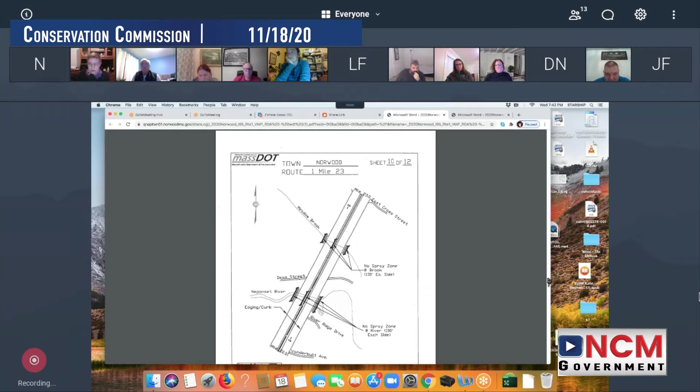Route 1, you should start on plan 8 of 12. So that's not quite the start - there you go, down one page. Nope, up, down, sorry. Yeah, right there, 8 of 12. That is, we're starting at mile marker 20 and going to mile marker 21.

Again, you'll see we have several no-spray areas by Traphole Brook, and one other brook a little bit south of there that does not have a name. Again, there's one just south of Union Street before - excuse me, that's in Walpole.

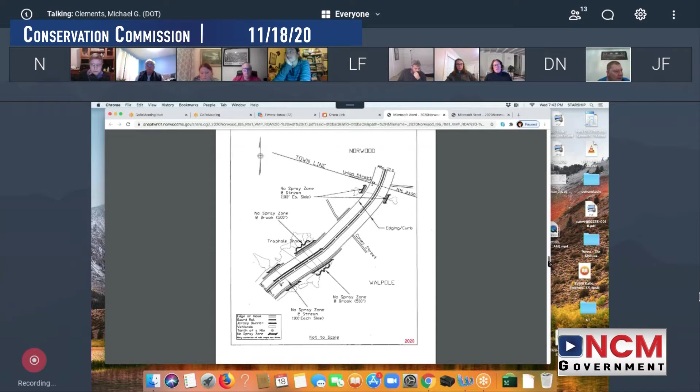Do you want to start in the first, little up to 21? We don't really see anything there. So let's go to mile marker 22, next plan 9. That's it.

Again, Traphole Brook is pretty much at mile marker 21 there. Then we're going up towards Morse Street. There's a series of wetlands there that we're not spraying.

Let's go down to page sheet 10. There's Meadow Brook that's not sprayed, and then on sheet 12...

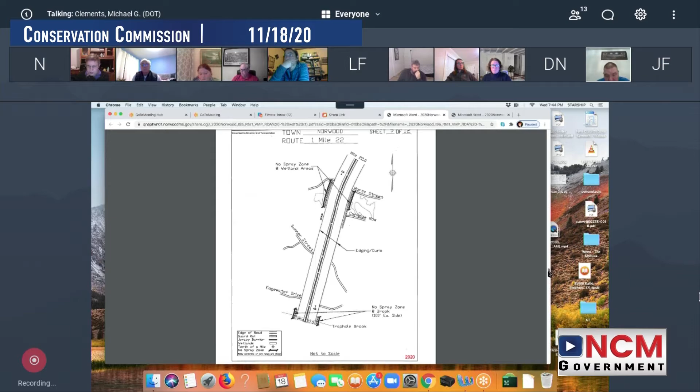On sheet 12, there is - go back up, sorry - on sheet 12 there is, let's see.

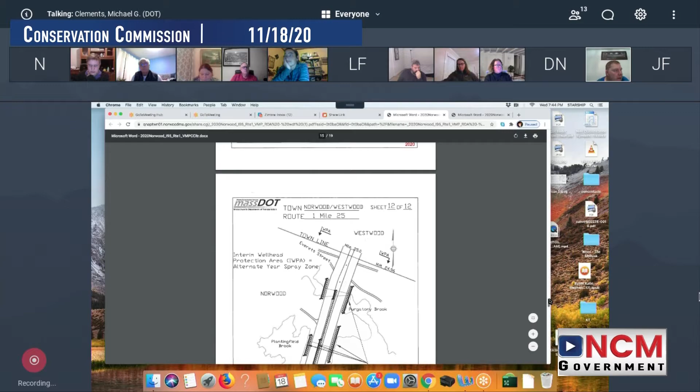Going into Westwood, there's the Plantingfield Brook and Purgatory Brook where we have no-spray areas. Again, those no-spray areas where the brooks are, they're 100 feet - basically 100 feet back of the wetland area associated with the brook. I feel that we're pretty protected there.

Also, if you notice, just in that west area pointing downward is an interim wellhead protection area, which is protecting the area in Norwood from mile marker 24 to mile marker 25.

That's an interim wellhead protection area that is protected by DEP. There's a well near there, and that's why that interim wellhead protection area is there.

In those areas, we only spray every other year. So if we were to get approval this year, we would spray most likely in the spring, sometime in May and June, and then next year, 2021, we would not be spraying, and then we would spray again in 2022. All right, so that's quickly going through Route 1.

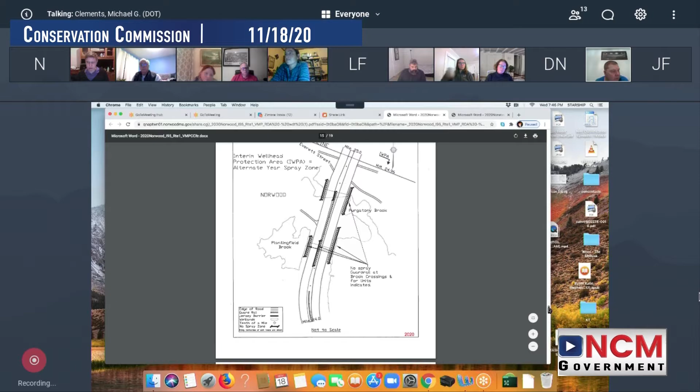If you can go into Route 25, Route 95, excuse me. We started at mile marker 21, and we go into Norwood at approximately mile marker 21.6 or thereabouts. You'll see there's a zone 2 now.

There's an identified zone 2 in the area. So again, that's a spray area where we spray. If we were to spray this year on approval, we wouldn't spray next year. We would spray again in 2022.

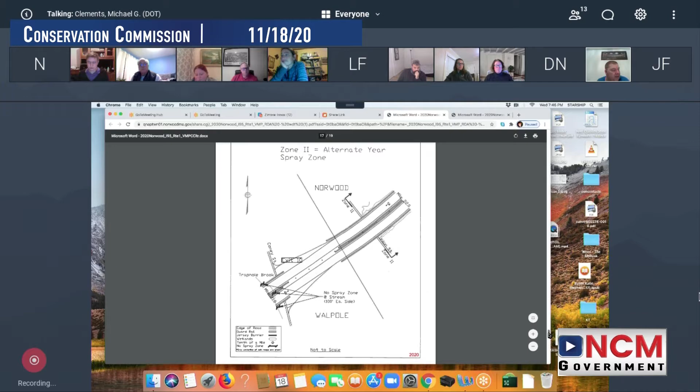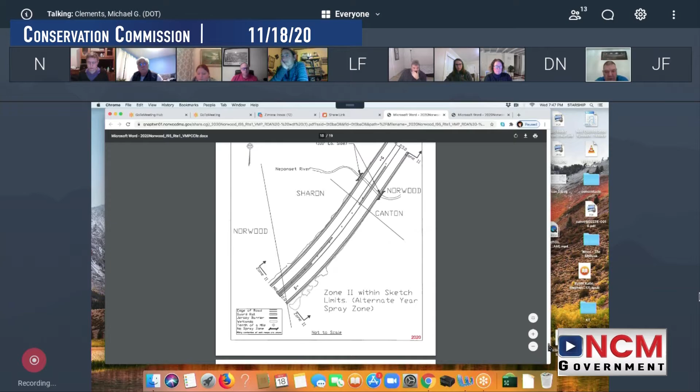Turning down to mile marker 23, the Neponset River crosses there, and we don't spray near the Neponset River. And then just north of the Neponset Street interchange, the Neponset River crosses back over it, and we don't spray near that Neponset River either. And that's pretty much the areas of spray, no spray, very quickly.

If the commission has any concerns or wants any additional no-spray areas, we're more than willing to entertain those and work with you to increase the area where you have your concern.

Thank you for that, Mr. Clements. I think at this point we could turn to Ms. Jones for some input, hear from her, and then turn to the rest of the commissioners with questions or comments.

I would say this was very helpful for me to just get a better perspective on the scope of the project. That was good for me. Okay, I hope it helped.

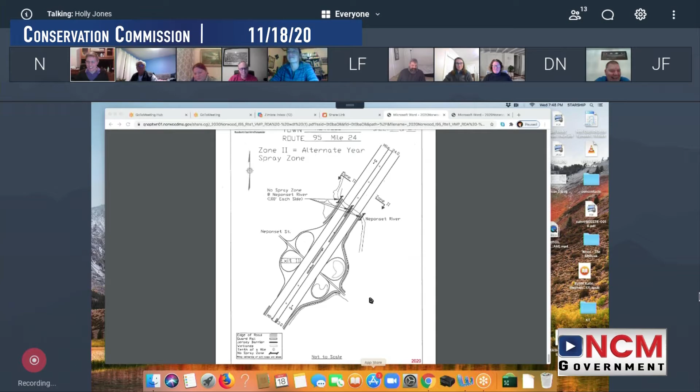Okay, I'm just trying to figure out how to turn off screen share. You're doing better than I am. Yeah. There you go. Okay, great.

So this application is under the Wetlands Protection Act only. I guess I actually learned a few things from Mr. Clements' presentation. I hadn't realized that it was going to be a truck application, and I hadn't realized that for wetlands that aren't rivers, you're spraying within 10 feet of the wetlands.

Within 10 feet. Now, I don't know if I mentioned how we delineate those wetland areas and no spray areas are. We have little reflectors that we mount on the guardrail or mount on the signpost that tell us where to spray and where not to spray.

They're color coded. Green is good for every year. Blue, I think, is every other year, and then red is where it's a wetland area where we're not going to be spraying.

Now you did mention that the setback typically for wetland areas is 10 feet. I'm more than willing to entertain a 100-foot setback for those as well.

I will say especially on 95, where it's a raised highway with like a 1-to-1 slope, by the time you actually get down to the toe of slope, you're probably close to 50 to 100 feet away anyhow. So I take that into consideration as well if you would.

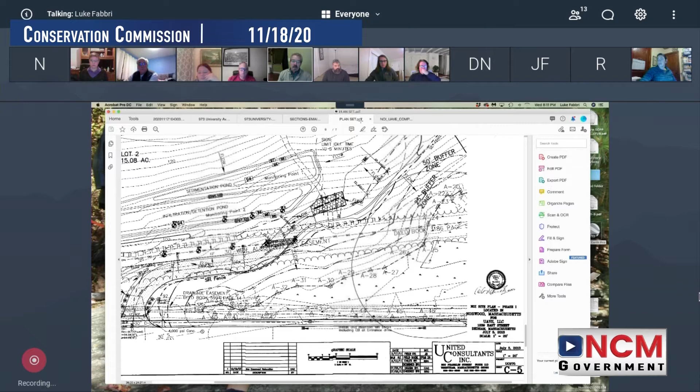This is the property here, these are existing conditions now, just showing all the contours, the existing roadway, which is right here, coming up.

Is my cursor visible like this? Can you see my cursor? Yep. Yes. Yeah, okay. Mine is just like a crosshair. So, just bear with me a second here.

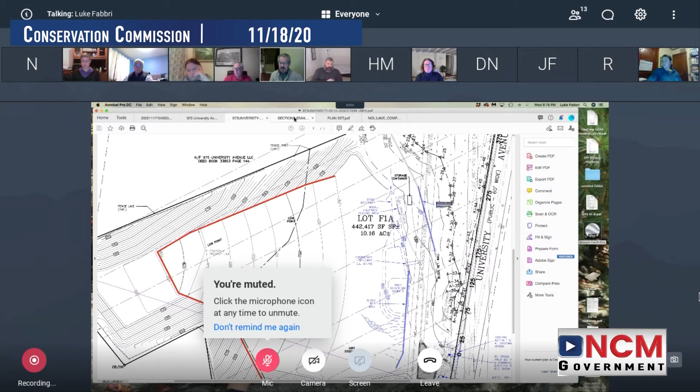For construction on the lower level, we would be placing silt fence on the property boundary between the property and the University Ave land. There are no stockpiles in this area. Everything dug out would go directly into vehicles and be transported up into the sand and gravel management area. Day piles, maybe putting some stone on the ground to use while we're doing construction, would be allowed. The area would be swept and cleaned at the end of the work day.

We expect what's left to be done to take about a week of work to accomplish. It may not be all done at once, like they'll do the lower basin in a couple of days and maybe a couple of weeks later do the upper basin. And that is everything that I have.

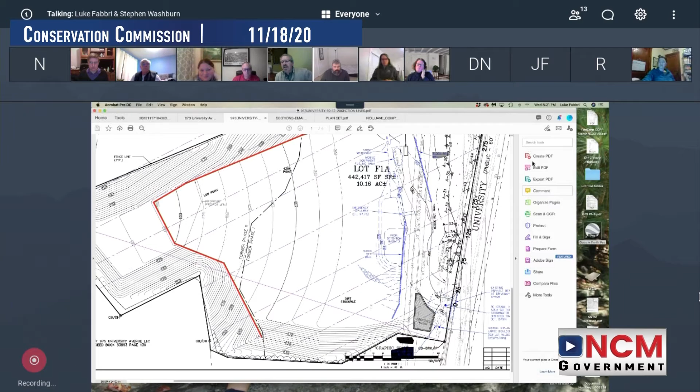Okay, thank you. Do I stop sharing? I want to see you all again. I can't see. I think if you hit that same screen share button at the bottom of your GoToMeeting application. Okay, it just changed shapes on me and I lost track of that button. I'm sorry. No worries. There we go, Mr. Fabbri, thank you.

I don't have too much to add. I think that was pretty comprehensive. I do have a question for you, Mr. Fabbri. It seems like the phasing plan that was originally proposed is now pretty impractical. Is there a phasing plan once earth removal begins again that will be done instead?

When you say phasing plan, do you mean phasing for the excavation? Yeah, you had phase 1 and phase 2. Yeah, so the last image presented what was proposed, what is existing, and what is again proposed to complete the project.

I have those plans that I sent you today that showed the relocation of the pre-cut line. If you share with me, I can put it up again. I think you're still a presenter. Oh, am I? All right, let's try it. I'm able to put it up again. No, yeah, it says I can't share my screen. Okay, mine says you're a presenter, so I don't know why that is. Let's see. Oh, because I don't know what I'm doing.

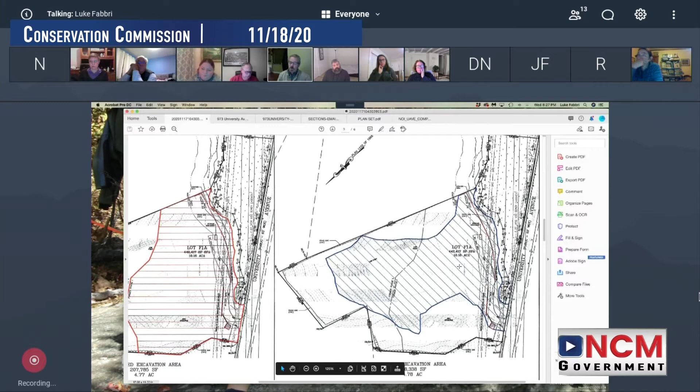This area was processed - this was a big pile of loam, and this whole area has been worked in. When they proposed this, they didn't think about how you actually have to do this. The engineer drew a line across this and said this will be phase 1 and this will be phase 2, but obviously that can't work that way. Mr. Federico is pretty efficient at doing these things, and he made a working area. If you go through Google Earth and look at the material that's come out of this facility, I don't know of any complaints about mud or silt getting off here - he runs a very clean operation, and he immediately got himself back off the roadway where he could work without tracking it all over the place.

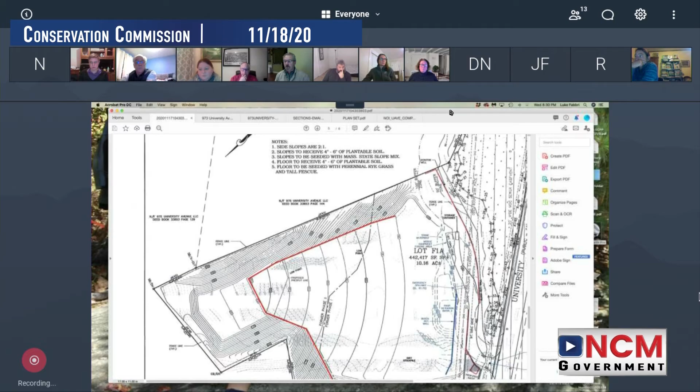This is, you know, what might be helpful - I'm going to, I don't know if it's going to let me do this. I'm going to open Google Earth, okay? There's an existing aerial photograph that I think would be useful in our discussion. Is that okay?

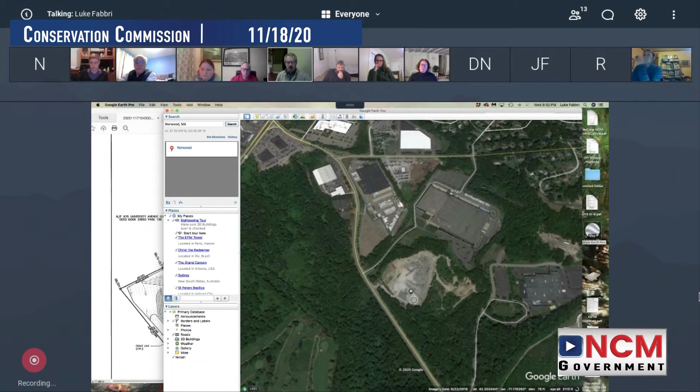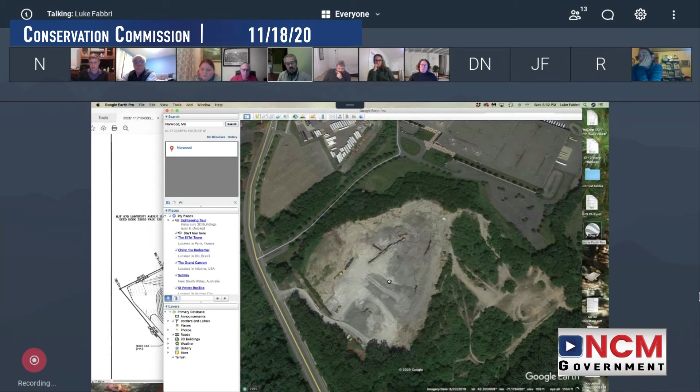Okay, so here we are - here's our access road. The orientation's a little bit different. This is coming down the slope into the existing detention basin. At the top, the trucks pull in, they come around, they get loaded, and they leave. This image is 2019, so it's a little dated, but it represents what's going on at the moment. This is our stockpile area that's used to feed trucks coming in, and the work area - they separate different grades of material based on size. Over on the left-hand side, this is the loam pile I was referring to. As they stripped off material, they constructed this loam pile that they screen and sell as they can. You can see they're working down here.

They drive up this roadway to get to the top, and they come around this edge. Recently, the area where trees were cut down to remove more of this sand was in this area. It doesn't show on this piece of property, but there's an area that was of issue because the logger cut trees down that were not on Joe's property, and he's working to resolve that now. So the site kind of exists like this today. More has been taken out, but there's really nothing else to be stabilized at this point. The area back here is not getting used and is vegetated, but everything else is kind of in play.

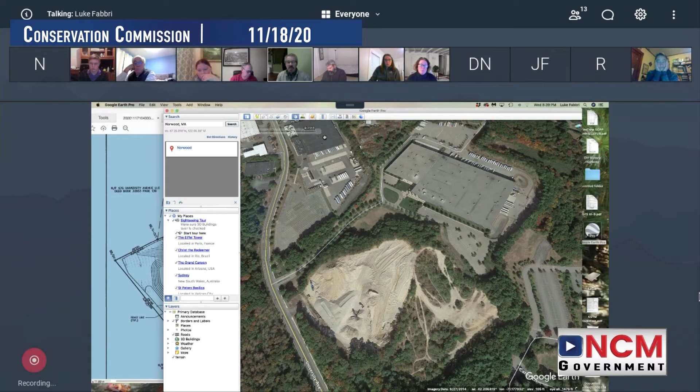The next image is 2015. The same thing is going on. You can see over here there's the large loam pile, and different piles of gravel that have been screened and sorted. There's some material up here on the driveway, but you get down to University Ave, there's nothing out in the street. This is in full swing, and the street is clean.

2016. So they've removed much of the sand and gravel, and they're starting to break into the bedrock. This is their working area right down here. They have aggregate piles for sale. There's stormwater coming down into this detention area, and there's nothing out in the street.

The access road comes up, and this is the access road that comes up along the top of the property to get up here, because we're still at 160 feet up here, but now the floor of this is at 86 feet. So we're going into the rock face.

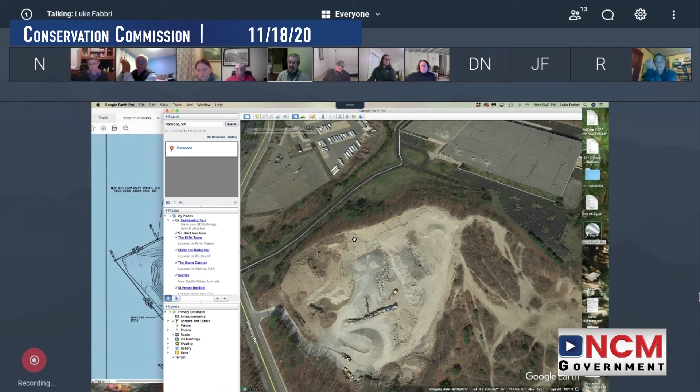2017, processing more rock, still have sand and gravel coming down. They're over here digging into the loam pile, processing that. This is what I mean by the perimeter road around here, which is what will become the slopes that will be graded, loamed, and seeded. It'll be like an amphitheater inside of this area, and there'll be a flat floor, which you could put a parking lot, a building, or whatever you want on it.

This is 2018. They're working more into the rock face, but they're still sorting materials. They still have their access road. There's a little bit out here at the beginning of University Ave, but it's really pretty clean. Again, you can see how the trucks come in, get loaded, and come out.

Then I think we're back to where we're at. Well, this is last year, so the same process is taking place. This is very close to the property boundary. There are some trees along the edge of the property boundary, but it's very close to the boundary pretty much all the way around it. As you can see, this is what we're looking at.

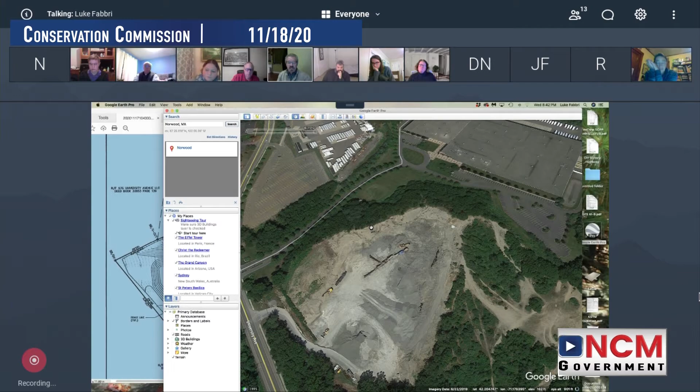So when he's done, this would all be sloped and graded like this, that perimeter area I'm talking about. When you drive into this, it's going to look like a big road cut, an amphitheater with a flat bottom, that you can use to construct whatever's going to go in there.

So it's not unusual to have sand and gravel operations where you finish an area, take care of the sidewall, and move on. At this particular location, the sidewalls are the access roads, and you can't do that until you've finished using them. So what they propose to do on the site is what they're doing. It's just not a clear-cut phase 1, phase 2 sort of thing in a horizontal sense. It has to be vertical. It's going into a hill, and you can't get around to the backside of the hill because you don't own that land.

Okay, so we have a grading plan that's out there and has been proposed. What we can do is, I think we need to come up with a seeding plan and a vegetation plan that would be acceptable at the closure of this project. I believe the Zoning Board of Appeals would like that. We have to do it for the stabilization of the project. You can't just leave that up there and expect to use what's underneath it, because it's going to erode. It has to be stabilized. And yeah, that's what the pile of loam is for.

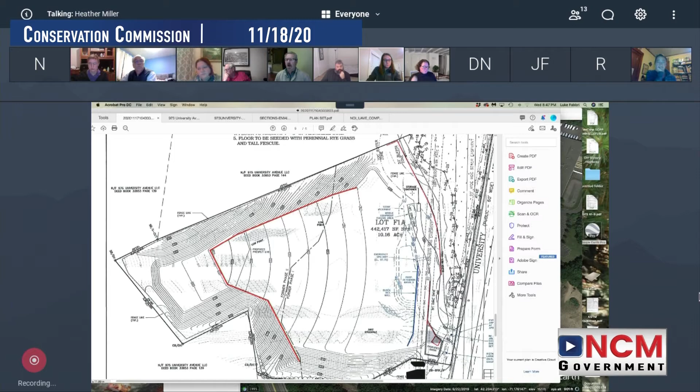Mr. Fabbri, would you like to respond to that? Yes, I would. My client fully intends to execute everything he said he intends to do. He was taken to task by the Attorney General's office. He realizes that even though he's running a clean and tidy operation, he has to pay more attention to his paperwork.

I've worked with a lot of different contractors, and he's very particular about keeping his sites clean. He has the equipment to do it, and he's not afraid to do it. And I think the fact that there have been no complaints about this operation — I have no knowledge of any dust complaints, noise complaints, or tracking of material off the site and contaminating the road.

He is at fault for not following through on his paperwork. He's been fined by the Attorney General's office, and the project is back under all of the commissions again. I think he feels the pain of that and realizes the paperwork has to be followed through. He's hired us, and I've worked with FedCorp on environmental projects. I'm a licensed site professional. I've worked on their projects for about 25 years now.

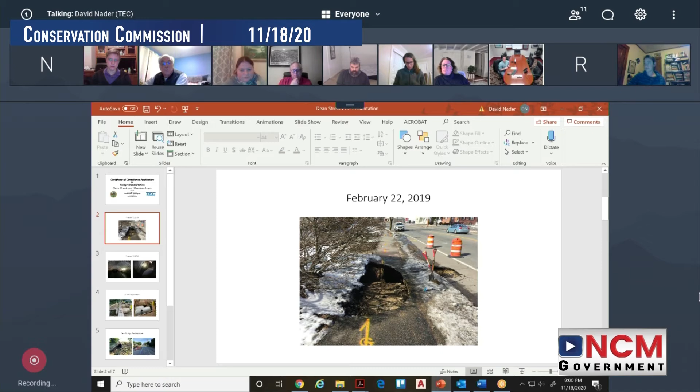So, like I said before, my name is David Nader from TEC, presenting on behalf of the Town of Norwood for the Dean Street Bridge rehabilitation project. On February 22nd, 2019, the culvert that ran underneath Dean Street collapsed underneath the sidewalk and the southern side of Dean Street, opening up a sinkhole. As you can see, it's a CMP archway. It failed right where it met a box culvert that ran another 300 plus feet, and let in a bunch of sediment and silt.

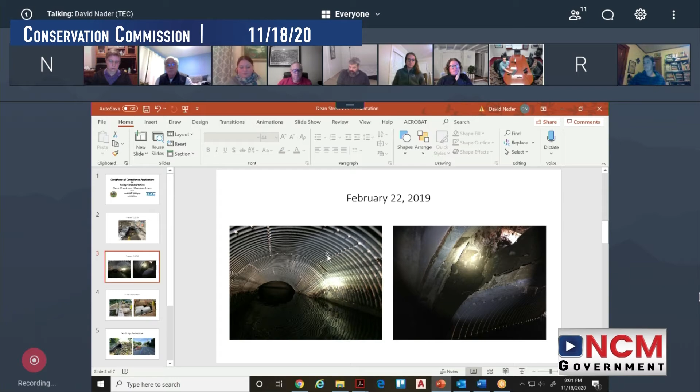We went through the permitting process in May 2020. We got the order of conditions, and shortly after that, construction started. They started by removing the overburden, then replaced the failed archway with a new archway, just a replacement in like kind. They reused the foundations that were still in place to minimize disturbance to the stream. Recently, it has been completely restored.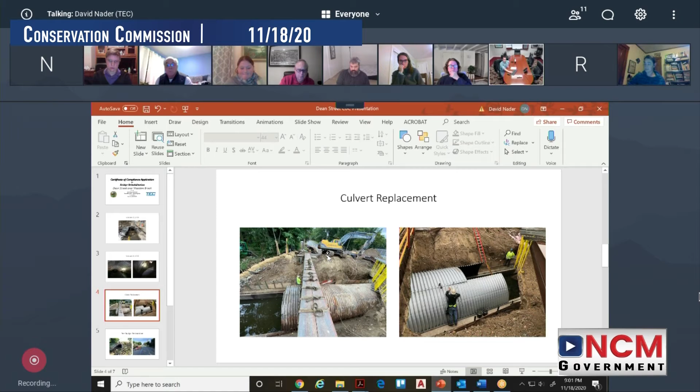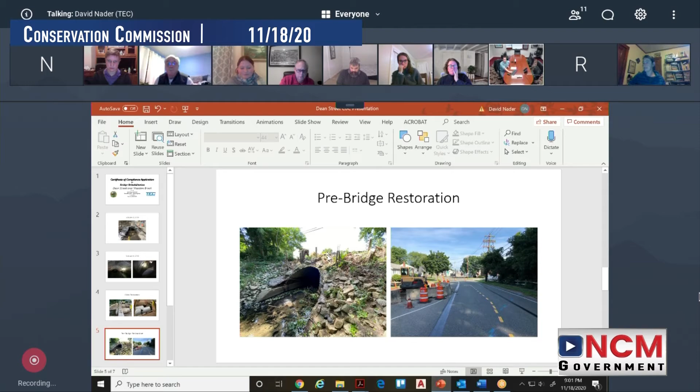I don't have a photo of that until the next slide. So pre-bridge, just the culvert archway, it was rusting out in the front. Dean Street was down to basically squeezing 2 lanes through 1 lane. Then the post-bridge restoration restored the archway and the riprap slope up to the roadway, replaced the guardrail. Basically did a whole overhaul of that entire bridge.

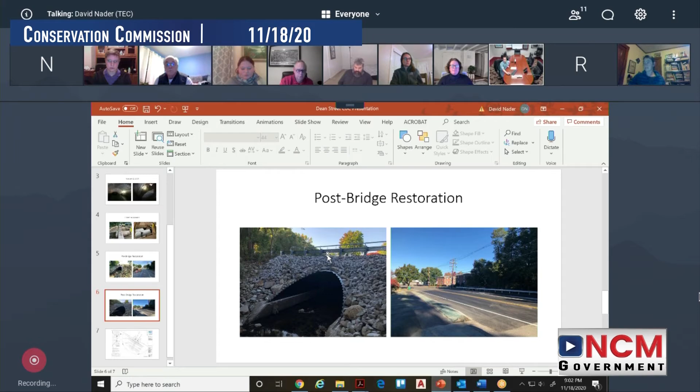Next slide is the as-built, which might actually be better shown as a PDF. If my mouse will work. There you go. Oh my goodness, I'm having all sorts of issues. I apologize, people. In any case, the project was completed as shown in the approved plans.

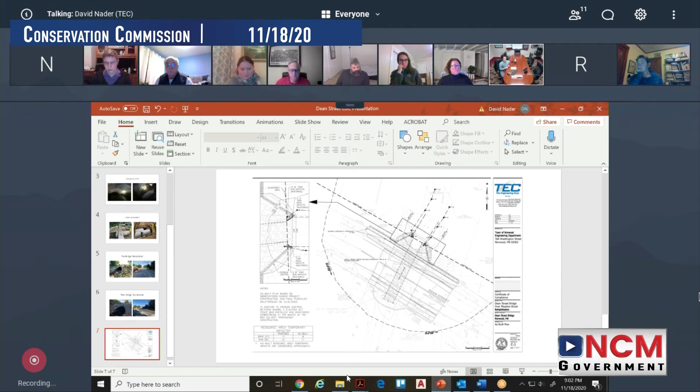The only differences were that there were less impacts to the bank and the bordering vegetated wetland, which was allotted for more than what we needed to use for erosion controls. The guardrail was shortened due to an alignment with a telephone pole, as the engineering department wanted to keep that open so they could plow through there. The grass strip that was proposed was actually removed and replaced with asphalt, due to maintenance issues down the road. They wanted to keep that asphalt to allow a wider asphalt sidewalk and less mowing in that one area.

I don't believe I have any other comments to make. It was a pretty clear cut project, everything has been restored. I did a site walk yesterday with Holly, and I think at this point I'll turn it over to her if she has any comments or questions. Thank you, Mr. Nader, I appreciate that.

Ms. Jones: So on the site walk we did yesterday, I verified that everything was stabilized. The project has been complete for about a month, and I had initially advised to wait until all of the grass had grown in to make sure that no earth was going to move. Everything is really well vegetated now. It seems like the substrate underneath the culvert is quite stable and not moving. Everything looked good to me on our site visit, so I would recommend issuing a certificate of compliance on this.

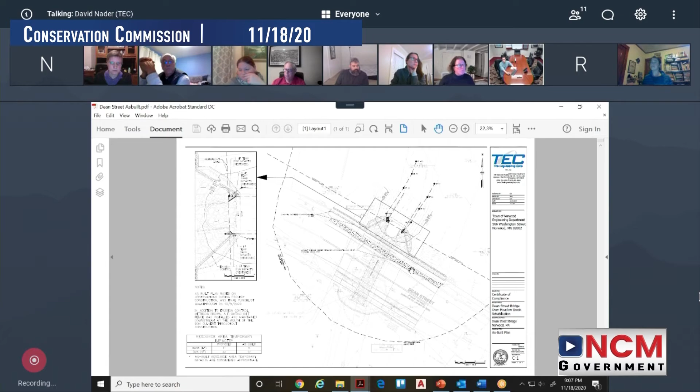Yes, I believe so. I believe that the way it's looked at from a stormwater perspective, it's over a bridge, and so any sort of vegetated strip, such as grass, is more superficial. It doesn't really equate to, or equates to a negligible amount of any stormwater infiltration, if that's what you're getting at. Thank you, Mr. Nader, yeah that is what I was getting at. I thought I had read a note or comment or line in the request that referred to that, so I appreciate the clarity.

Ms. Rockland. I had noticed in a photo that was included that there were two lines of rocks that went across the width of the brook, and Holly confirmed that those are gone now. And I was curious what their purpose was.

Let me see if I can bring up -- are you talking about in the NOI submission or in the as-built, the COC submission? It was in the letter to Stephen Washburn, I think it was figure 4. Okay, I had been concerned it was affecting fish passage along the brook.

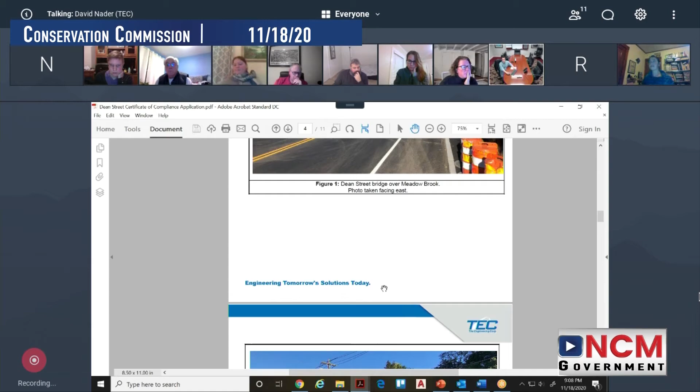I believe I know what you're talking about because I saw it, and the photos they gave me aren't working too well. But I asked about that too. We had guys on site throughout construction, and when this photo was taken, the water had significantly receded. It was in that time of low flow, and these rocks were there. They didn't touch these at all, they were just in the bed of the stream. Currently, though, the water has risen back up again, which covers these.

And I think I have -- actually, I don't have photos up right now of those, but I think if Holly has those photos it kind of shows that. I'm wondering if those do still affect fish passage at that height or not. I don't know, I couldn't speak to that. That was out of the area of where we touched.

I think that's an interesting observation, Ms. Rockland. It almost seems too crude to be any type of velocity mechanism, so what is it? I appreciate Mr. Nader's comment that it's outside the project, but very curious. Do we have other questions or comments? Mr. Bamber, I see your hand.

Well, just to talk to that, if you look at it, that's clearly all a man-made stream bed there. In my opinion, to your point Steve, concurring with you, that's just left over from previous attempts to work on the property. But that said, if Ms. Jones is happy with this, then I would like to make a motion to issue a certificate of compliance.

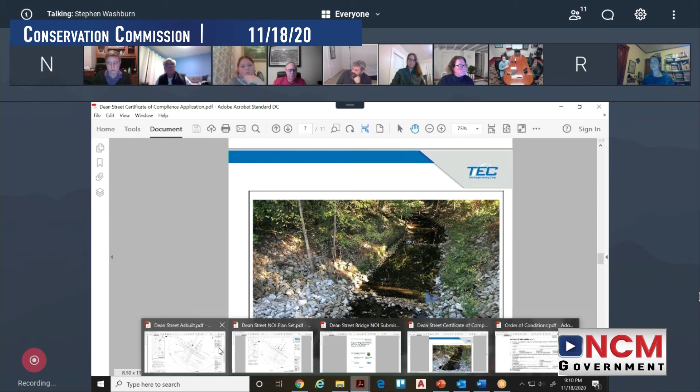Do I have a second? I'll second. Thank you, Ms. Walsh. As we've been doing in the remote environment, I will go down the list of commissioners and ask you to verbally state your position on this vote, starting with myself, Stephen Washburn -- in favor, aye. Chris Capizio? Aye.

Aye. Peter Bamber? John Gear? Aye. Heather Miller? Aye. Carly Rockland? Aye. And Catherine Walsh? Aye.

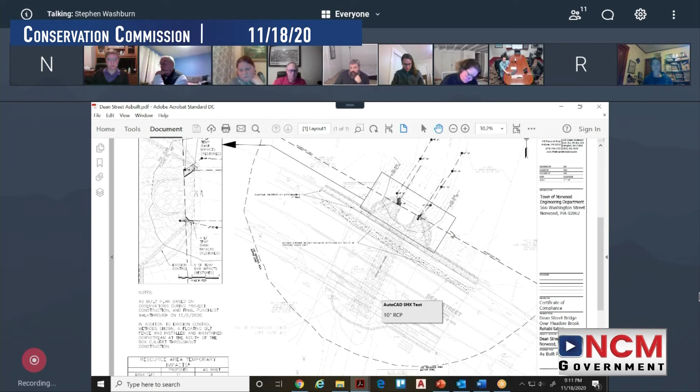Thank you for that, and thank you for being here tonight, Mr. Nader. Also appreciate some of the review of the presentation materials and you entertaining the conversation in question about those. Of course, thanks for having me. Thanks for hearing me.

All right, next on our agenda, it looks like we have a request for modification of wetland replication area for DEP number 251-0485, Norwood number is N2017-03. Site location is Norwood Airport Hangar. Ms. Jones?

Yeah, so we have Randy here. Do you want to have this off, Randy, or do you want me to explain? Yeah, I don't have the ability to put the plan up, Holly. Are you able to put the plan up? Yep.

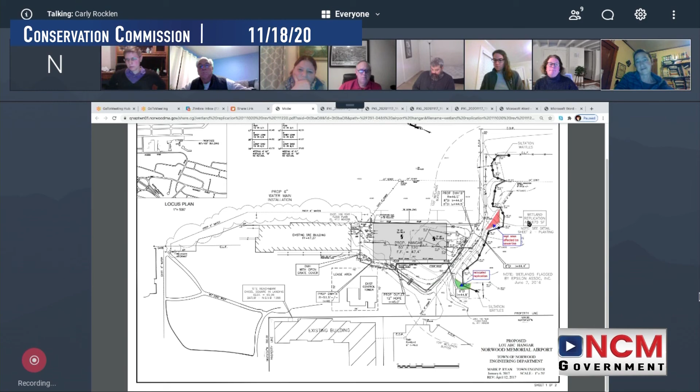It's a thought. Good one. Holly, can you stop sharing your screen so we can see people? Sorry. Yes. No worries. And I agree, Carly, that's a great idea.

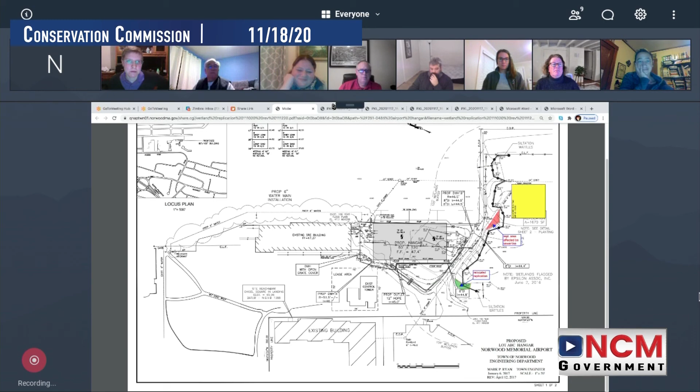I guess I could add a little bit more. When I worked at NEPRA, and NEPRA was managing Willett Pond and the shoreline there, they would educate the abutters about how best to manage their land along the water. So I know that's happened, but that was a while ago, and I wasn't sure how widespread that was across the town. Thank you for hearing me.

Did they do mailings, or what was the education method? I think there were workshops, because they'd go around to the folks living there, and if they saw a violation, they would work with them to try to fix it. I wasn't involved in that myself, it was a different employee, Tom Palmer, who's still there in a different capacity.

So, considering workshops about shoreline management, maybe reaching out to NEPRA to see if they have resources or suggestions for doing that, sounds like the direction you're suggesting. Potentially, I'm not sure what else is out there, whether it's DEP or other folks. That's just my experience, I know the NEPRA connection.